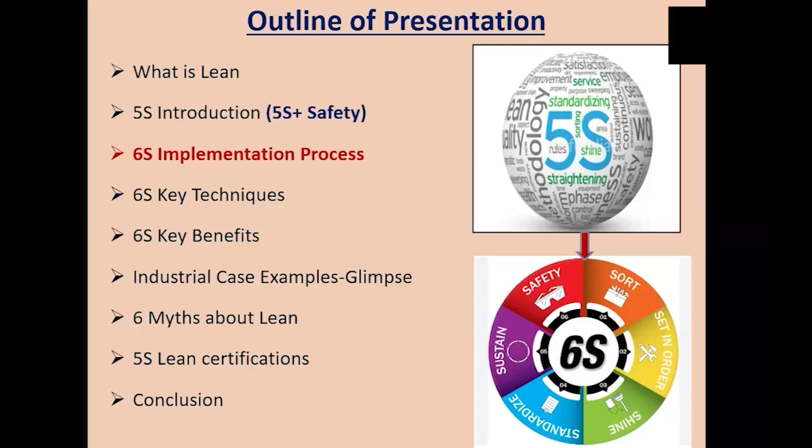So firstly, we will discuss what exactly lean is. We need to understand first of all what this term means. It is a systematic approach to identifying and eliminating waste, non-value added activities, in a company's operations. Now we need to understand first of all what exactly waste is. Waste is any unnecessary step in a manufacturing process that does not benefit the customer, and therefore the customer does not want to pay for it. Or we can say that waste is any process that the customer does not want to pay for.

Lean is defined as a set of management practices to improve efficiency and effectiveness by eliminating waste. The core principle of lean is to reduce and eliminate non-value added activities and waste. In Japanese, waste is known as muda, which means waste - the easiest way to describe something that does not add value in lean methodology.

A core principle in lean methodology is the removal of waste within an operation. The customer would not be happy to pay for any action taken that does not add value to what they actually want. It is based on the philosophy of defining value from the customer's viewpoint and continuously improving the way value is delivered by eliminating waste.

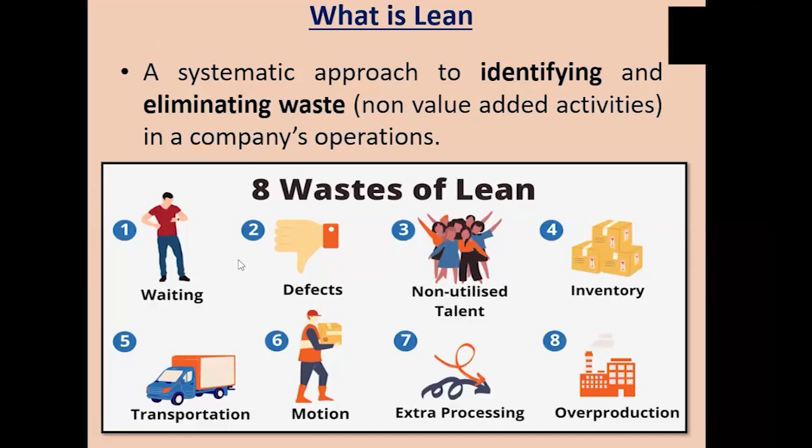DOWNTIME is an acronym that represents all 8 different types of waste in continuous improvement: D stands for defects, O stands for overproduction, W stands for waiting, N stands for non-utilized talent, T stands for transportation, I stands for inventory, M stands for motion, and E stands for extra processing.

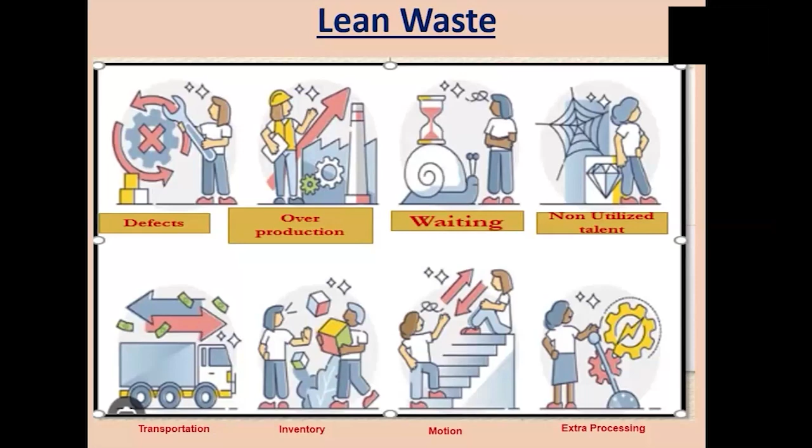Anything that does not increase value in the eye of the customer must be considered waste, and every effort should be made to eliminate that waste. Systematic elimination of these wastes can result in faster processes, lower cost, higher productivity, higher quality, and happier workers, which is very important in order to keep customers happy.

Now we will understand why we usually say that 5S is a starting point or foundation before going for other lean tools. There are other lean tools available also, like value stream mapping (VSM), total productive maintenance (TPM), just in time (JIT), total quality management (TQM), and Six Sigma. So why is it said that 5S is a starting point, the fundamental tool?

Because it is a great way to eliminate waste. 5S creates a visually attractive environment in which the workplace is self-explaining, self-ordering, and self-improving. These are the three main key terms we use to explain why 5S is the fundamental tool.

If the workplace is full of clutter, it is less productive. Working in a beautiful environment creates positivity and good energy flows. 5S techniques work from the assembly line to the offices, to the work zone area where we sit. Wherever waste and inefficiencies lie, Lean 5S is a wonderful tool and philosophy to create order and motivation in the workplace.

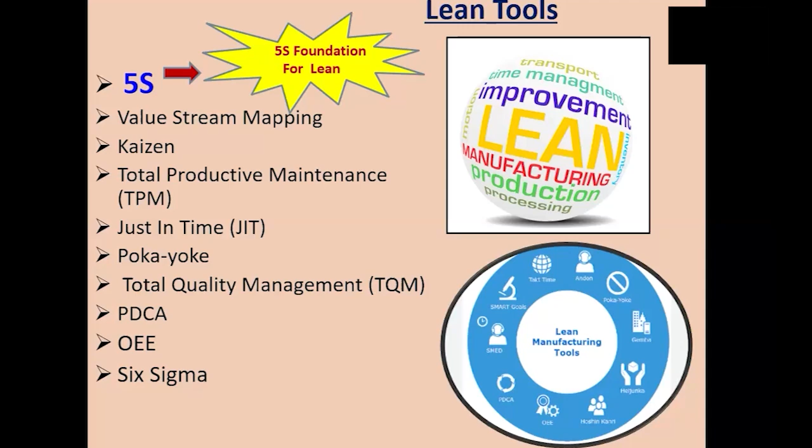When we go for the implementation of any other lean tool after 5S, like Six Sigma, value stream mapping, just in time, or TPM, it will provide a very conducive, healthy, and positive environment.

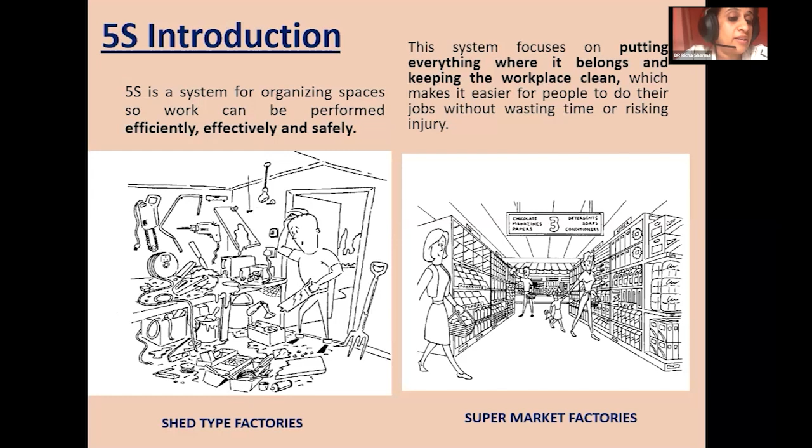When we work in a dirty workplace, we are exposed to lots of bacteria that represent a health risk. This makes us feel uncomfortable, lowers our motivation and work standards, and finally results in low productivity.

On the right side you can see a supermarket image, which is internally organized. The shelves are clearly marked, and you can immediately find the item you're looking for, so nothing is lost and no time is wasted. The whole environment is very pleasant and clean. Waste and abnormalities are immediately recognized by anyone, and anyone can retrieve the information or equipment quickly.

Once the supermarket vision becomes reality in your workplaces, in industries, in manufacturing, especially in engineering-based industries, your workplace will become a more pleasant and healthy environment with zero defects and zero abnormalities. This vision is achieved through 5S or 6S implementation.

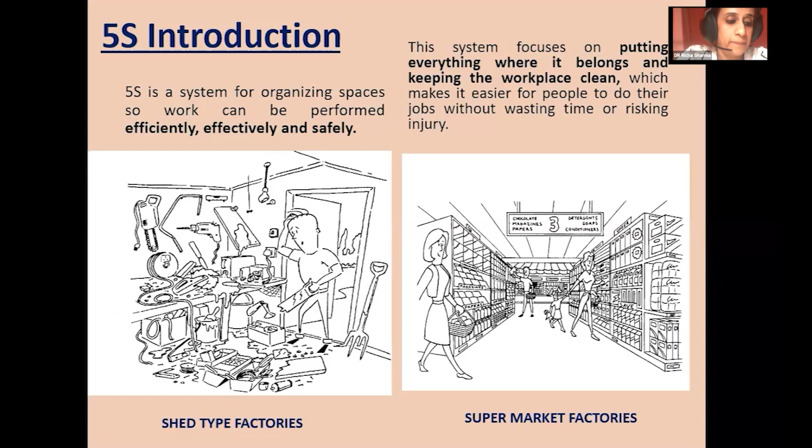So two questions arise: why is it called 6S, and why have we added one more S to 5S? Because we added a sixth S, it is called 6S. This means we have added an additional parameter, that is safety. So it is also referred to as 5S plus safety. The goal of 6S is to make safety a core component of all lean manufacturing processes. 6S lean not only helps organizations promote efficient working environments, but also establishes a sustainable culture of safety.

Why did we add one more S, that is safety? Because safety is the topmost priority in every workplace. Some believe safety is already integral to the classic 5S methodology, so why is it being incorporated as a separate step? Adding safety helps provide further focus on safety issues, especially for industries involving high-risk jobs such as construction and food manufacturing. The extra attention given can help ensure that no dangerous or risky items or conditions are overlooked after going through the 5 stages of 6S lean.

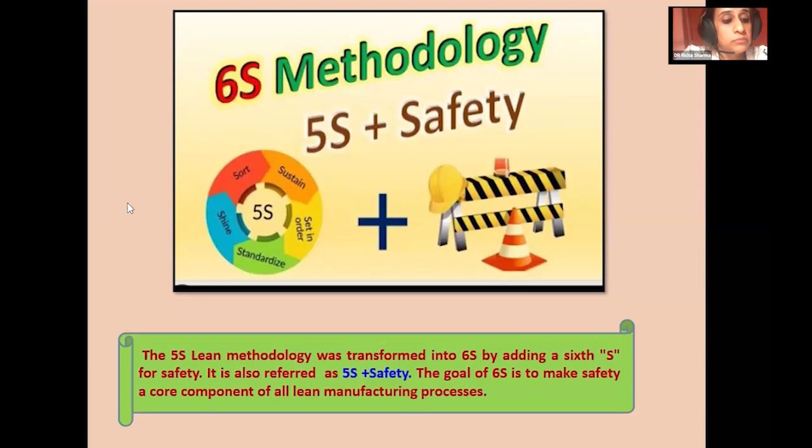So in a nutshell, 6S is a method of creating a clean and ordered workplace that exposes waste and makes abnormalities immediately visible. Why? Because it is a basic and very powerful tool in the lean enterprise, which we have already discussed in the previous slides. Its success has a wide impact on 6 parameters, that is on productivity.

It improves productivity, it improves quality, and it lowers the cost. By implementing this lean tool 6S, it raises product quality and improves work productivity, which results in lower costs and higher efficiencies. Then it improves delay, because there will be fewer and shorter delays due to better workspace organization and easier location of required tools or documents.

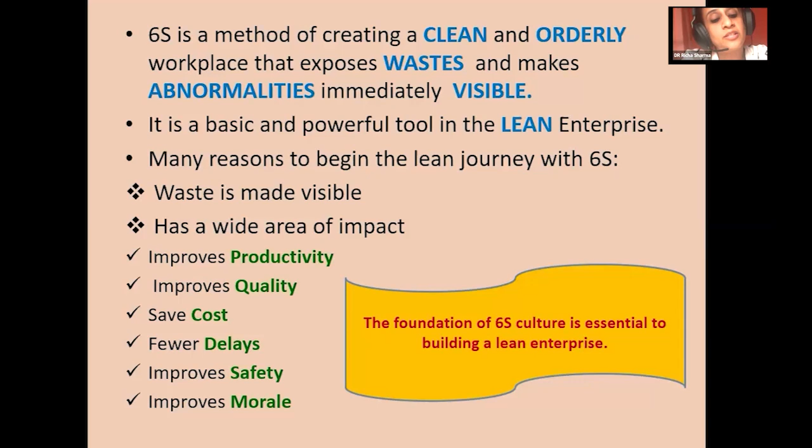And of course, 6S improves safety, which creates a very healthy environment in the company, because a more organized, cleaner workplace will have fewer hazards. Finally, the last parameter is morale, because a pleasant and organized workplace leads to improved employee attitudes, as every employee has responsibilities and duties aimed at a common goal, maintaining the 5S standards which leads to a sense of teamwork and a shared vision.

Now we will understand 6S in a more formal and structured manner, what the different 6 steps are which are required for full-fledged implementation. The 6S method originated in Japan in the 20th century as part of the Toyota production system. This tool is very practical, very real, and hands-on.

The 6S quality tool is derived from 5 Japanese terms, which begin with the capital letter S, and a 6th S is added, which is called safety. The equivalent terms in English also begin with capital S. In fact, it was adopted to such a widespread extent that it helped shape the entire concept of lean manufacturing. These 6 terms represent six operational steps, which every industry, every organization, is required to follow in a systematic and sequential manner.

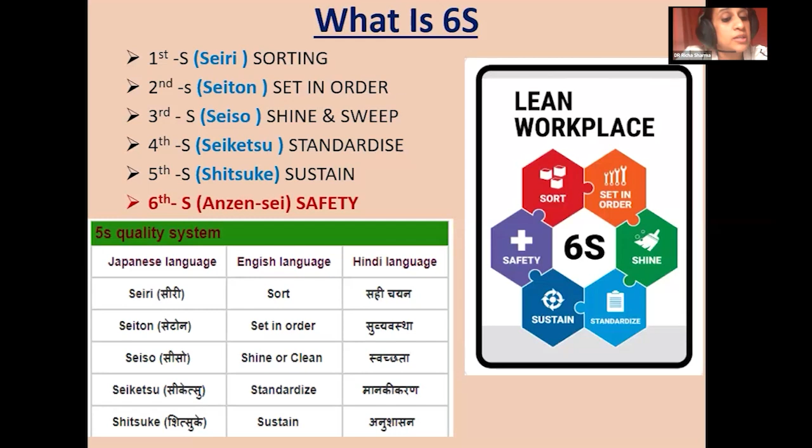And finally, last is safety, which controls and creates a stress-free and healthy atmosphere where workers can feel safe and secure. So now we will understand the 6S implementation plan step by step in an elaborative manner, which is divided into 3 phases. Now the first phase contains 4 criteria.

So before launching or introducing this concept in your workplace, the first thumb rule is that we have to complete the important preparation stages. The first step is to create a blame-free environment. So what exactly is a blame-free environment?

It is one which allows everyone in the organization to use their talent and skills effectively, because when troubles or mistakes occur, the individual should not be blamed, instead the focus should be on finding the root cause of problems. So a blame-free environment encourages participation, and by creating this environment, all individuals have the courage to try out new things, take initiative on their own, and are ready to tackle tasks ahead of them. So the first thumb rule is to create a blame-free environment.

Then, of the 4 criteria, once the blame-free environment is created, we can start with establishing a 5S policy. Most companies nowadays have a mission statement, like what is your company's mission statement. So design a 4 to 5 line simple statement of your 5S or 6S policy and display it in all zones of your plant organization so that it is more visible to all employees.

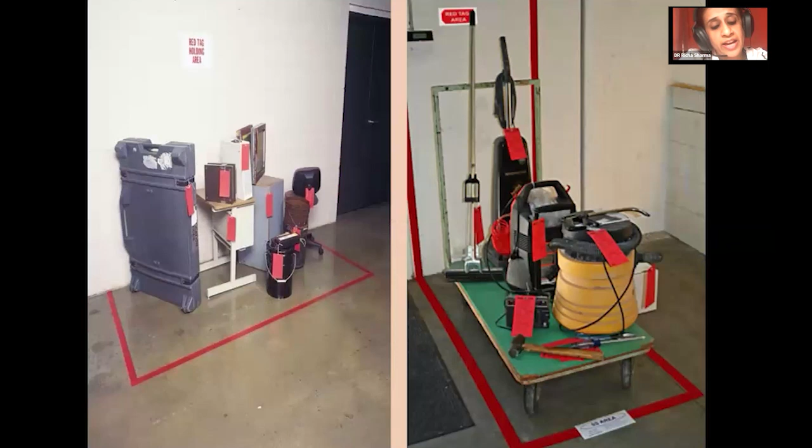You can see here there are many cluttered and unneeded items with red tags attached. Similarly, here you see unneeded scrap, office supplies, and shop floor items like defective computer pieces, tools, jigs, documents, files, and books attached with red tags, all kept in a red tag holding area. All scrap, defective items, unwanted cleaning items like vacuum cleaners are properly labeled with red tags and placed in the red tag holding area.

Now, once all the unneeded items are properly tagged, hold a red tag auction. We all know what an auction is: items are sold to the person who offers to pay the most money. We have to decide an appropriate amount of time to keep the items in the red tag holding area. Typically a month is required, or ideally one month is sufficient, because once an item is placed in the red tag holding area for a month, it's the ideal time to conduct the red tag auction.

Moving to the next step, once sorting is done and the red tagging technique is fully implemented, red tag auction is completed, then ideally we move to the second step. As we need to go in a systematic sequential order, we can't go to the fourth step after the first, so we need to maintain that sequence. The second step is Seiton, which basically means set in order.

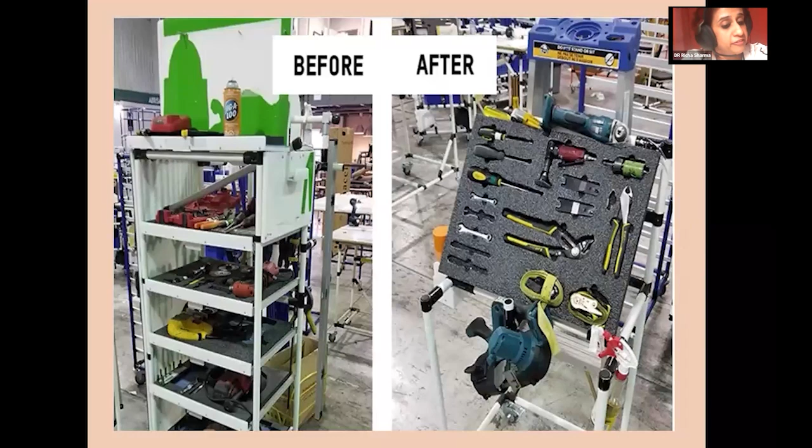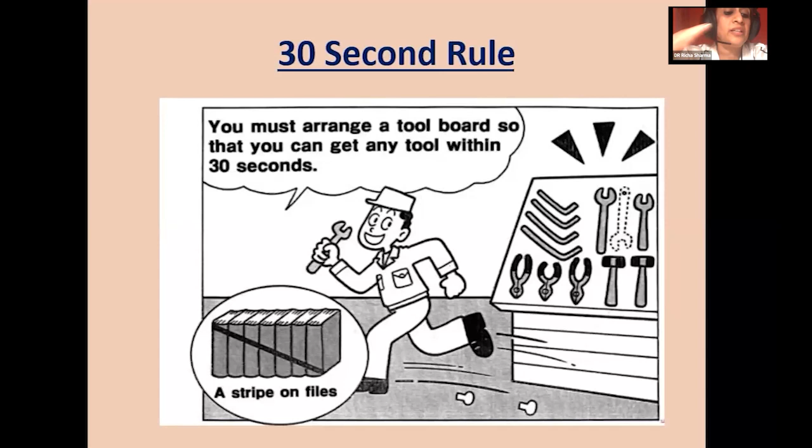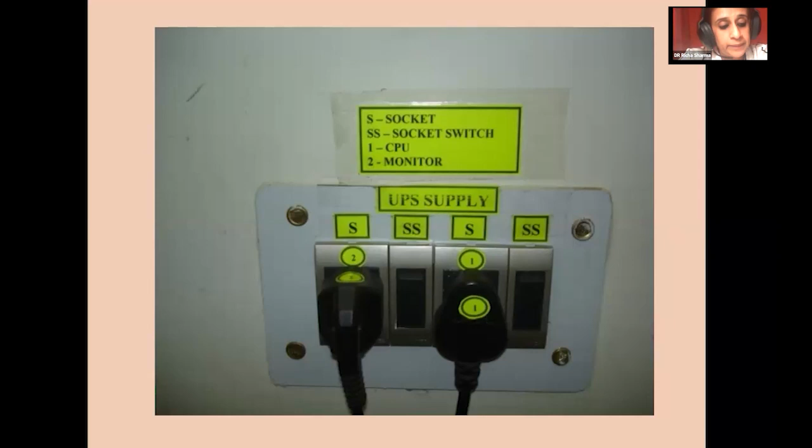After the implementation of two steps, first sorting and second set in order, once 1S and 2S are over, we can see a reduction in file searching time. After removal of all unnecessary, unwanted, or duplicate items, storage space has increased and it creates a neat and organized workplace.

In the second step, the locations of all files, documents, and records are defined along with signboarding. These are the various benefits we can feel: increase of productivity by decreasing the time spent retrieving a tool, cost saving because lost tools do not need to be reordered, and reduced injuries because tools are stored in convenient and ergonomic places.

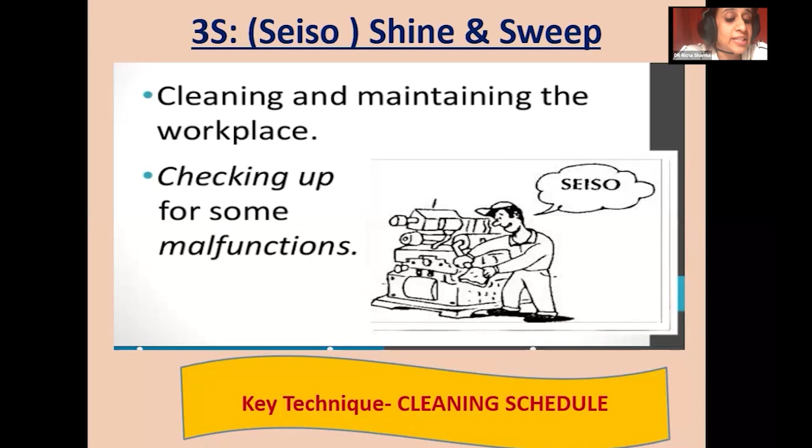Well implemented shine and sweep programs have long-term benefits when it comes to employee morale. Not only are workplaces clean and more efficient, but caring for the equipment on a daily basis also increases employee satisfaction with their contribution to the company.

Now this is a very important thing we need to understand. Usually we call it the third step as cleaning. It doesn't mean we are just creating the workplace as a dust-free environment. That is not the main objective of the third step. Cleaning is basically a form of inspection checking because it leads to the discovery of abnormalities. Cleaning does not mean just to clear the dust on the main part of the machine.

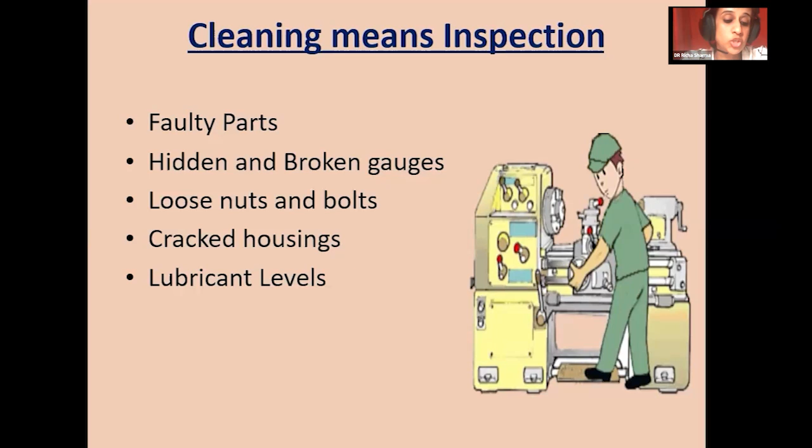Next, the fourth stage is Seiketsu, which means standardize. What exactly does standardize mean? It allows you to standardize all the operations in your workplace, having chosen the best practices to perform the operations, and allows anyone coming in from outside to be able to perform those operations in exactly the same way as you are doing them now.

So standardizing leads to create visual controls, and makes your workplace a visual managed area. In this simple image, the success strategy is basically broadly divided into two steps.

In the first step, sorting, setting and shining take place. In the second step, these first three steps are consolidated by establishing the fourth step, standardize, the fifth step, sustenance, and the sixth step, safety. Standardize should really be effortless, because if you have properly executed the first three steps, it will be very much beneficial.

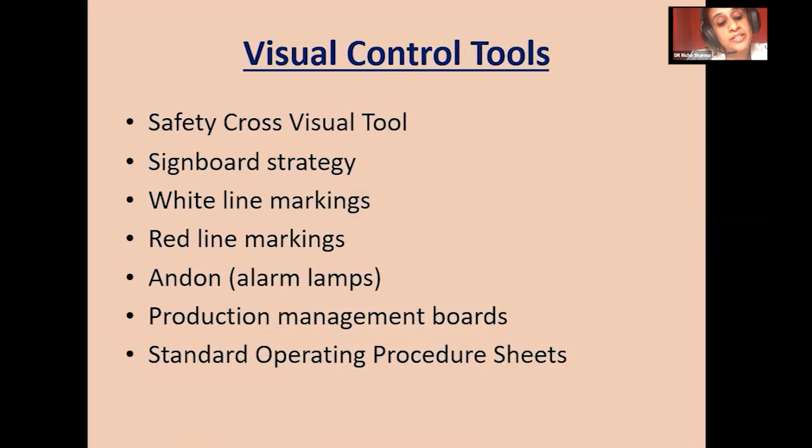So what exactly is a safety cross tool? It is a visual tool that tracks when and how often accidents happen. As safety is always a topmost priority, many organizations use this tool. Days that are accident free are shaded with green, while days shaded in red are days when an accident occurs. The cross shape is not mandatory, but is used frequently as a cross symbolizes safety.

So other color codes can also be used, like blue for renovations, modifications, or improvement work. Here you can see images showing how the signboarding is being followed. In the signboarding strategy, we set up signs showing what belongs where and in what amount, so that anyone will be able to understand where things belong.

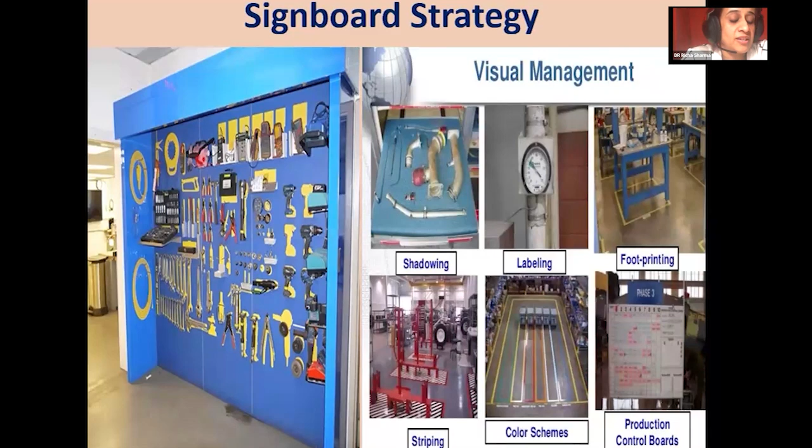So we have already discussed that signboard strategy is a tool that makes the whole organizing process more visible. Next is color, which is the most effective means of communication. By using floor markings to define pathways and storage locations, you can see how different color codes are used to identify work areas, machines, workstations, entire production areas, and even temporary work areas.

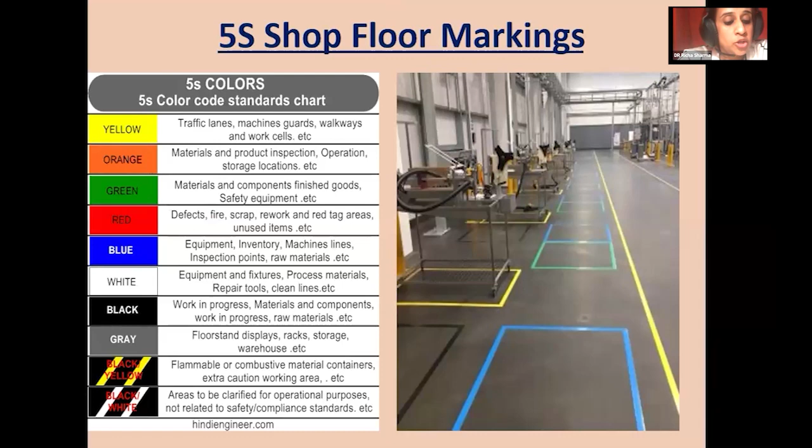Next is andon. Andon basically means something which immediately alerts factory supervisors to abnormalities that occur in the factory. Andon is a Japanese term which means light, or we can say a lamp. In lean manufacturing, an andon refers to a tool that is used to inform and alarm workers of problems within their production process. It is a visual method to quickly identify issues, which allows for quick and swift action and resolution.

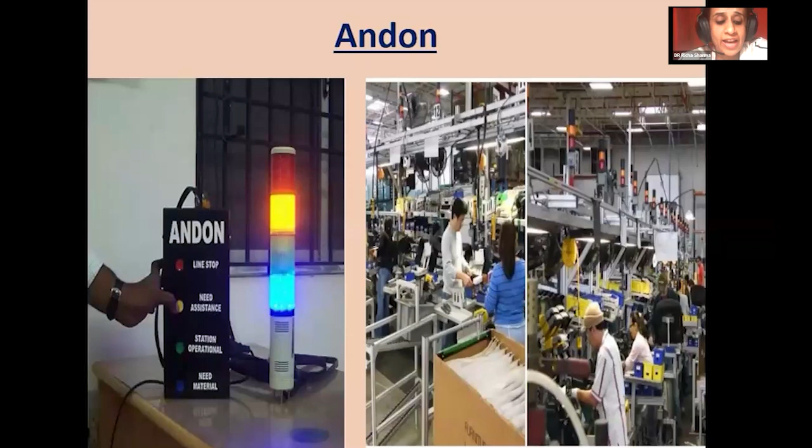These are the display boards, another visual tool that indicates the current conditions on the production lines. Data shown on these boards includes production results, operating conditions, causes for line stops, and team members. So all this information can be displayed on the display boards, or production management boards.

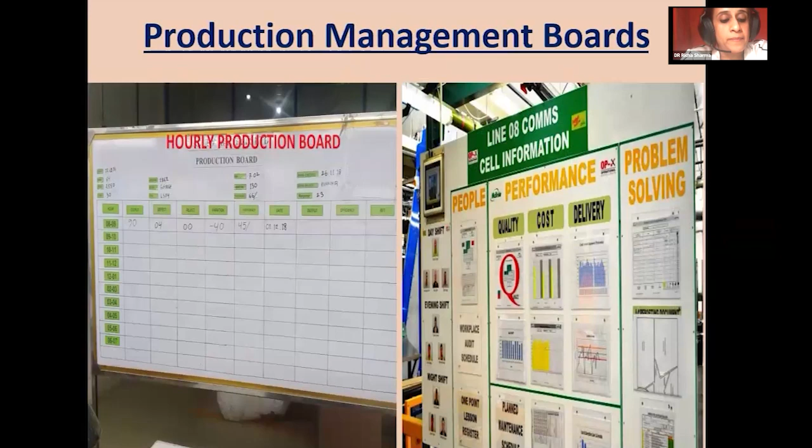This is the most important visual tool, known as standard operating procedure sheets. These are the sheets which should be put up at each workstation, and operators should be encouraged to come up with new ways to update the procedure sheets.

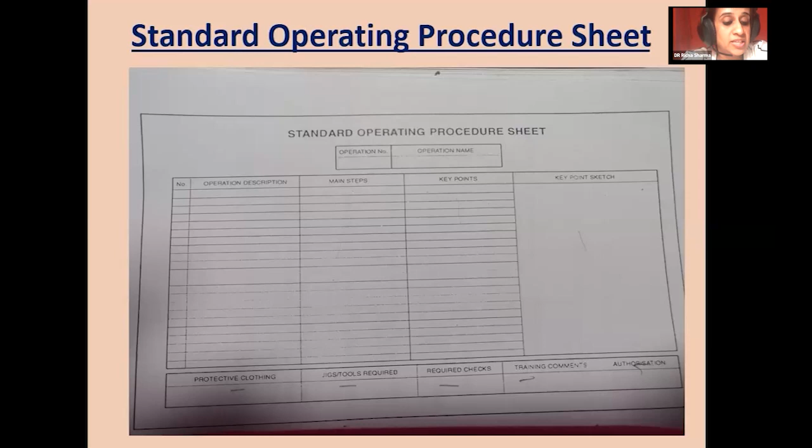Now the next, 5th stage is Shitsuke, which means sustenance. The objective is to sustain the improvements and make further improvements by encouraging effective use of key techniques. Shitsuke means commitment, or we can say sustained discipline. Basically, it focuses on taking all of the previous steps of 5S, including the standardized procedure, and transforming them into ongoing habits to follow the discipline. It means sustaining a productive work environment.

The responsibility for Shitsuke is shared between the management and the workforce. The key techniques used in the fifth step include continuous 5S promotional activities, auditing, reward and recognition programs, and training programs. So there are many ways; the first is 5S promotional activities.

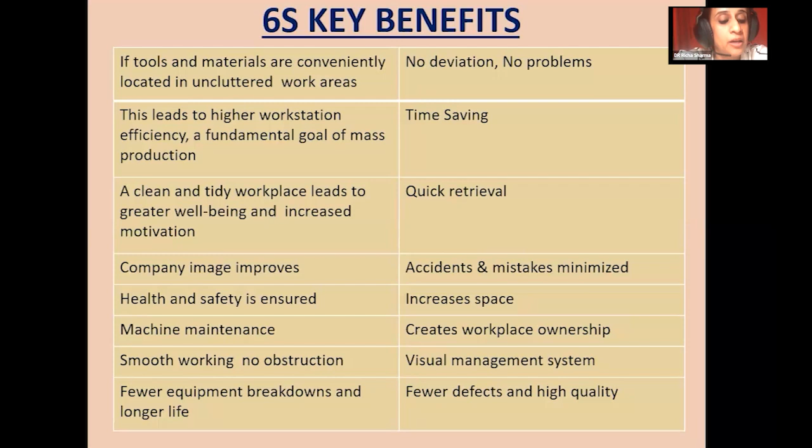I'll share a few industry names - many top original equipment manufacturers or multinational companies have actually implemented this Lean Tool 6S, like Maruti Suzuki, Hyundai, Tata Motors, Ford, Hero MotoCorp, HP. Then there's APSEZ, which means Adani Port and Logistics, and it is the first port in India to implement the 6S workplace management system. It is the largest commercial ports operator in India, accounting for nearly 1/4 of the cargo movement in the country. Adani Port and Logistics has been awarded a certificate for the implementation of the 6S workplace management system by the NPC, that is the National Productivity Council.

It's not only in manufacturing industries or engineering industries, in the shop floors or assembly lines - that's not true actually. The 6S methodology is a very versatile tool. It is being used in various other sectors also, like in hospitals, healthcare centers, medical practices, education sectors, colleges, schools, offices, canteens, even in the computer industry - like at HP, they are using the 6S tool because having computer parts sorted, properly labeled, and stored in easily accessible areas makes manufacturing faster and easier. This tool is also a perfect fit for the retail sector, because it promotes sorting and organization - two elements that benefit both retail workers and prospective customers. Hence the 6S Lean tool is a versatile tool which can be used in many sectors, both in manufacturing and in service sectors.